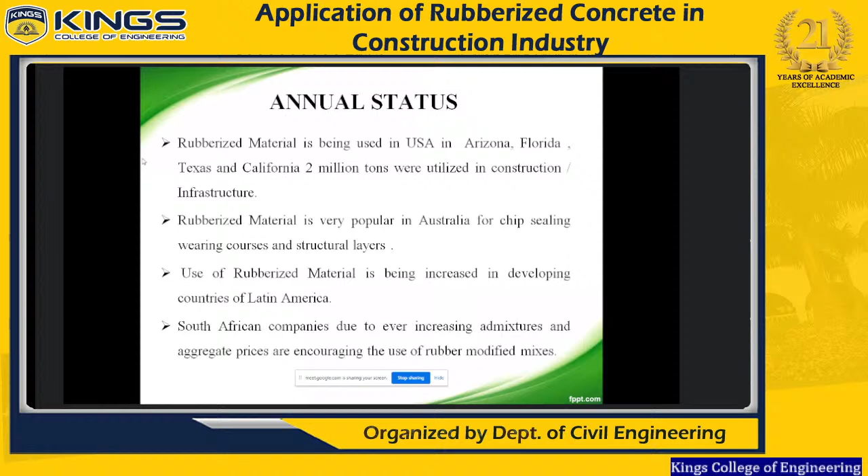The Rubber Board is located in Kottayam, and most natural rubber is obtained from Kerala and some parts of southern Tamil Nadu, like Kanyakumari and other places. There are a lot of rubber trees there, but they don't meet the actual demand of consumers or customers, so we need alternative material. Some synthetic materials are produced for rubber, and most probably those are being used since natural rubber has limited use and is insufficient for the consumption needed.

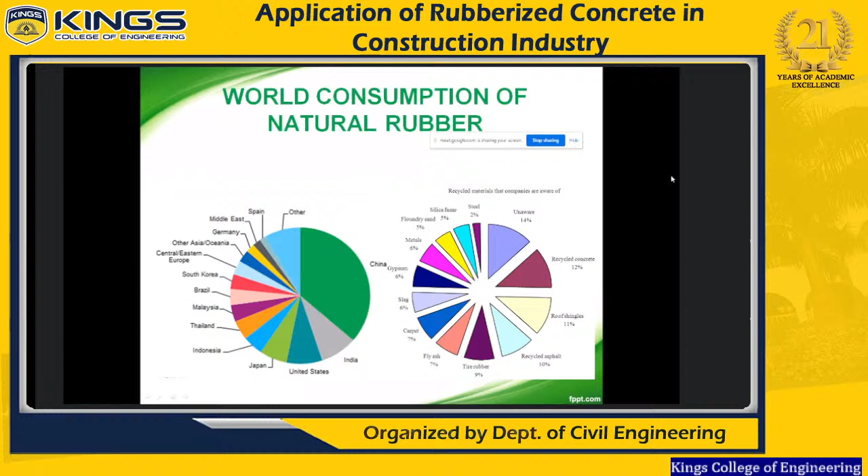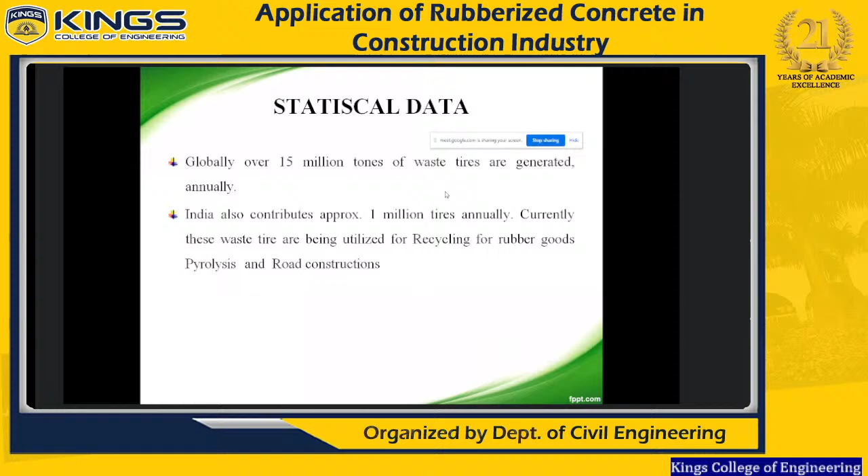It is some statistical data. We are aware that globally we have 15 million tons of waste tire generated annually. India also contributes 1 million tires annually. Currently, this waste is being utilized for recycling for rubber goods. Some are using pyrolysis and road construction.

So we see here for dumping or burning, somewhat huge smoke will be there. It causes underlying air pollution. Don't think that we are creating the air pollution only at a particular source point. It's not the same - the air pollution travels a few hundred kilometers.

Even that's why we are facing a lot of this in Delhi. So the air pollution is not just from the automobile and other things in Delhi. There are point sources and non-point sources. Somewhere in other states, Haryana and Punjab, after harvesting, they burn wooden material and other things. It also causes that. So it travels a long way, it doesn't have a particular point.

It may have traveled, so it's a very tough task to estimate or assume where the pollutant air transfer occurs, where the plume will be dispersed due to wind and other directions - they travel anywhere else. But somewhat limited for consideration is solid waste.

We know that dumping yards will be there, and the leachate goes down and at times groundwater is also to some extent contaminated. Same like the liquid waste, for example wastewater streams for consideration - river Kaveri in Tamil Nadu.

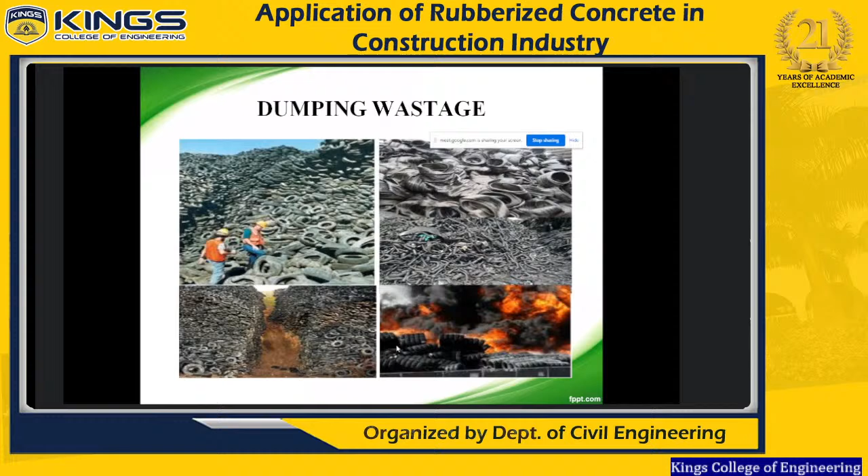There it starts from Mettur Dam up to Trichy. There are a lot of point sources that pollute in Bhavani. There are some industries there for dyeing industries, Komarapalayam, Pallipalayam. Same like that, Karur also has a lot of industries that dispose directly into the Kaveri River. This also pollutes it. That is the entire scenario.

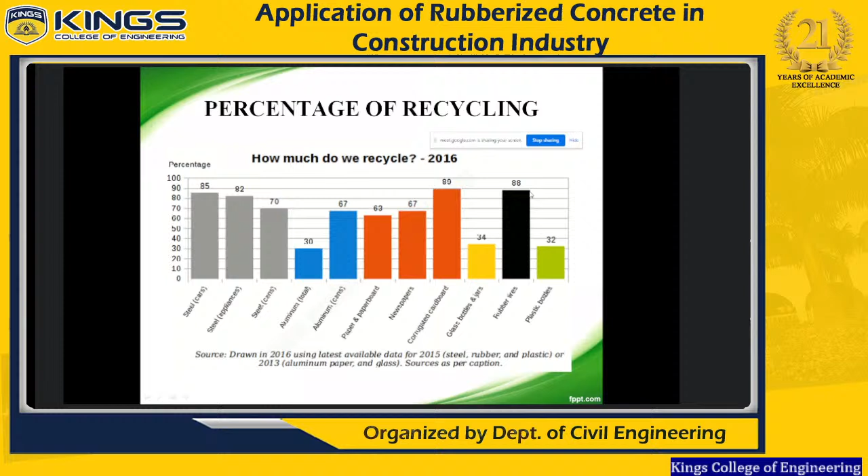So we are more focused on the waste tire material, how to have a good material that is reusable or recyclable, where our application is concrete, especially for civil engineering experts. We searched the literature review of what is there for using the rubber material for consideration in non-load bearing structures like paver blocks.

So we need paver blocks for railway platforms and others. Even of course there are temples, car parking, as well as bus stands - we need these for paver blocks, hollow blocks somewhere. We think for electric poles, retaining structures, insulation structures, the waste tire material may be identified and used. So load bearing structures, somewhere in railway sleepers if possible, as well as foundation material.

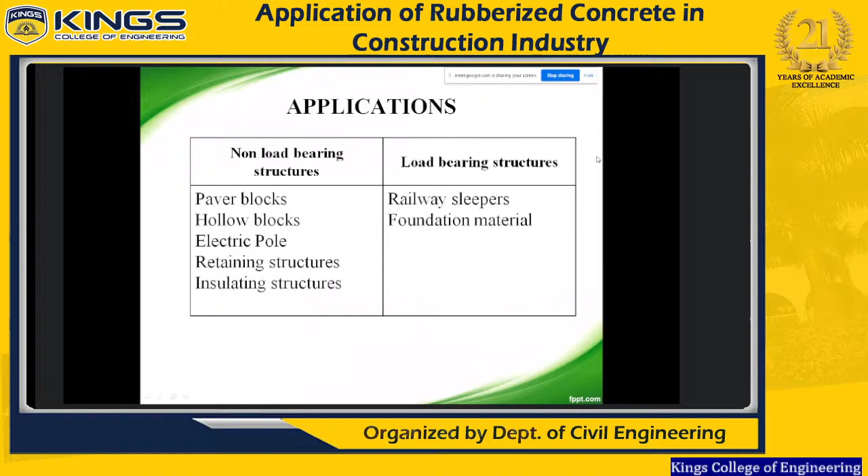So good bearing between earth and that's somewhat in base isolation structures - whether for earthquake and other natural events, we need some cushioning effect for that. So we think these are the applications. So somewhere this is visible in literature - I'm not spending much time here.

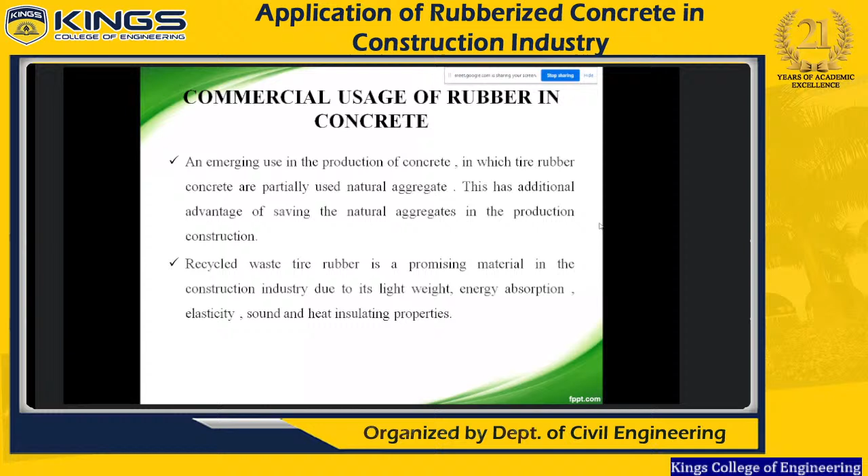So commercially it's rubber and concrete. A lot of literature is available. Most probably rubberized concrete is so-called 'lightweight concrete.' Somewhere there is energy absorption, elasticity, good elongation material for rubber, some action usage, and sound and heat insulating properties also have been observed.

So we are identifying some stronger and weaker areas. The stronger area, somewhat identified, is seismic resistance being strong, good insulation, increase in elastic property. The weaker area is of course we are aware that there is not a good bond between rubber particle and the concrete material, whether fine aggregate or coarse aggregate - not a good bond.

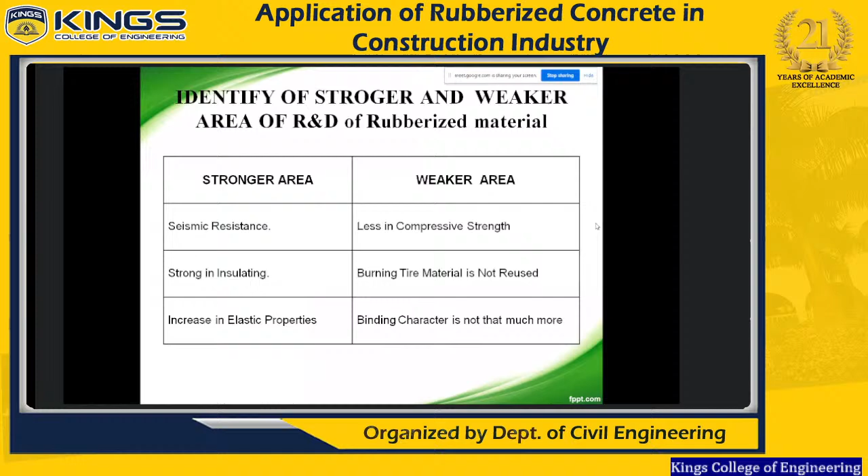We conclude that the most focused research isn't always positive research. So we add some material in the concrete, whether fine or coarse aggregate replacing that, and we got good strength. Only accepting that is not a correct way. Even negative research is also good.

For rubber, we are already aware that waste tire material added with concrete definitely reduces the compressive strength. This is an institutionally known truth. But we want to explore to some extent how to reuse or maximize the use of rubber material in concrete. That's why even if the result values will be less, we think about what is the maximum optimum content of replacing rubber material to serve the environment, and based on that we have worked on this particular project.

So this is the main objective focus. This research focuses on application of experimental investigation on structural use of tire-derived aggregate to find alternate waste material wherever possible in the construction industry.

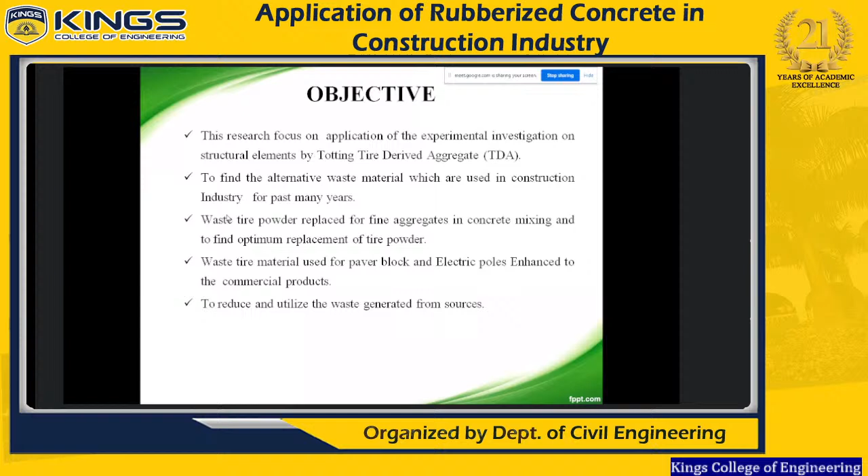Powder as well as fine aggregate are used, some as waste tire material. There are fibers as well, which are also reused to some extent, whether possible for electric poles or other commercial products, to reduce and utilize waste generated from these sources.

This is the methodology of the project: literature collection, identification, material mix design, and casting, comparing with normal control concrete by replacing materials. Finally, I have the results and discussion.

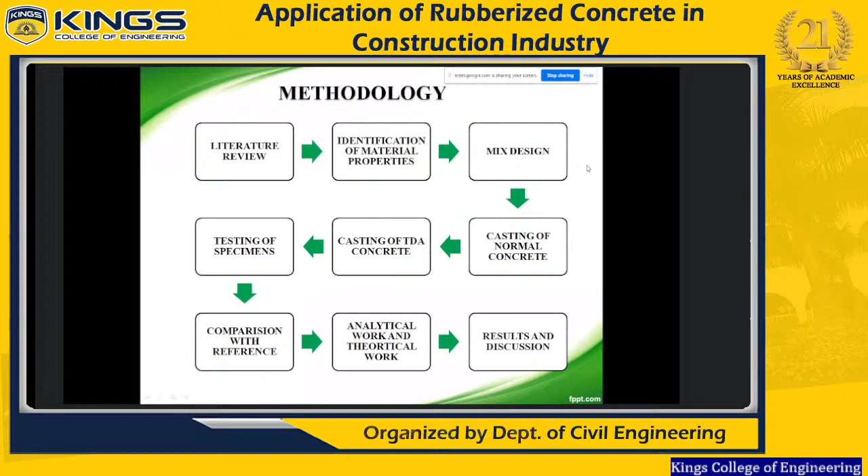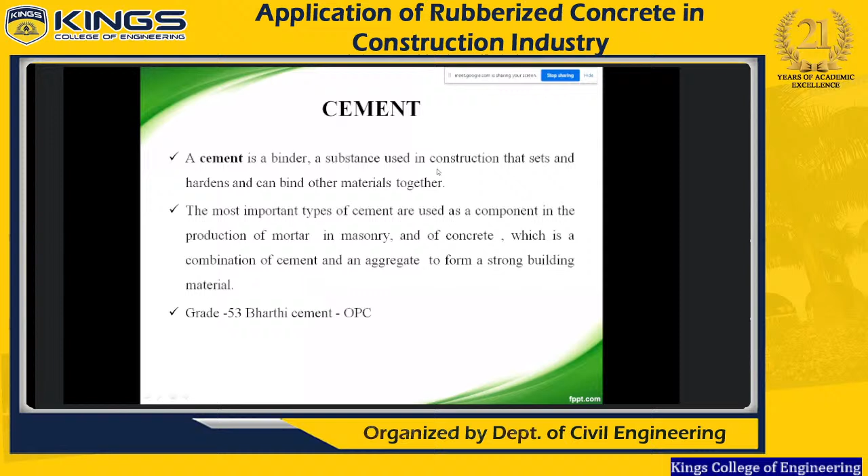This is the common material used in concrete. Cement we are using for this is 53 grade cement. River sand is also used, of 4.75 mm size.

Nowadays we talk more about M-sand and other types of sand because the Government of Tamil Nadu has banned sand mining wherever the Kaveri Delta region, especially the river course, is concerned. The river depth increases if it doesn't reach the water in time. Rivers naturally meander and through such activity produce some sand, but we were always over-mining the sand, which is not good for irrigation and other related activities.

So that's why the government banned it. Now we are thinking of alternatives such as manufactured sand, and others are using fly ash bricks and related compounds, and some use gypsum for plastering and other work. So we should not always depend on one material; we depend on other materials that are also good for that.

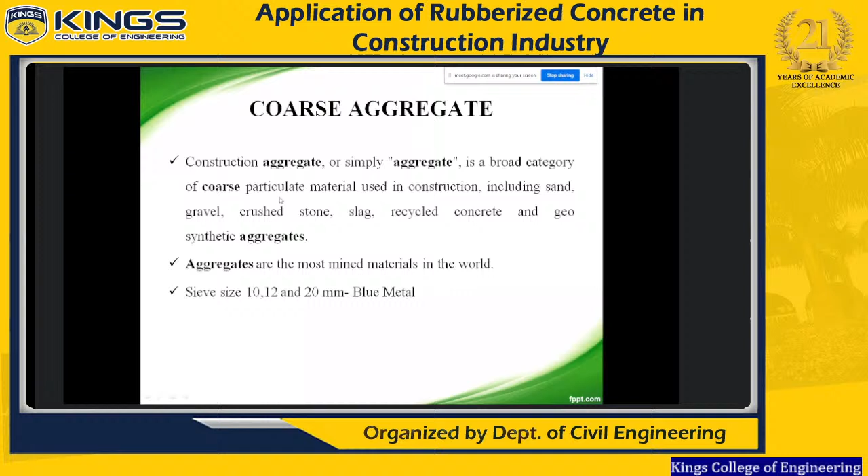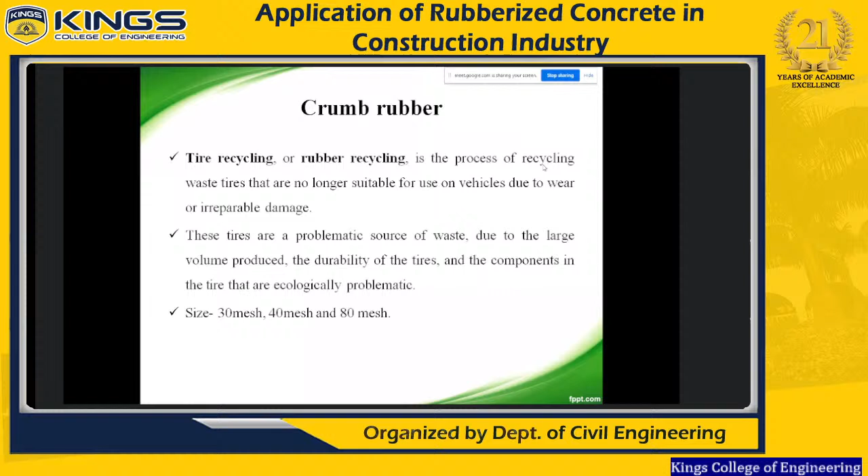Coarse aggregate is taken in various sizes: 10, 12, 20 mm. It's also obtained from sources such as paver blocks and AM bricks. We get material from different sources like marble powder and others. Crumb rubber of various sizes - 30 mesh, 40 mesh, and 80 mesh - is also taken from these sources.

We are taking rubber from two sources: one from Balaji Rubber at Salem, and Arihant Oil and Chemicals at Delhi. We procure these sizes of rubber. The 30 mesh is almost 0.6 mm. Some quality details are mentioned here too - waste tire chips is 10 mm.

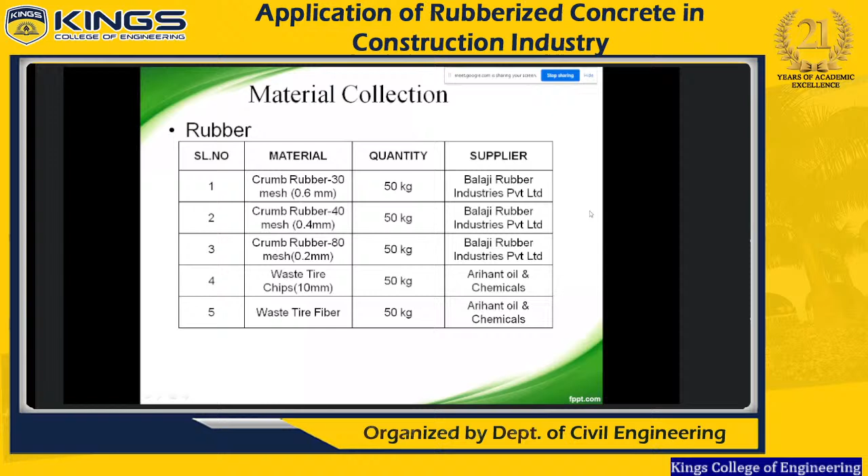Fiber is also obtained for replacing concrete in various ways; it's a substance of rubber. Its raw material, common manufacturing process, and other details are given here.

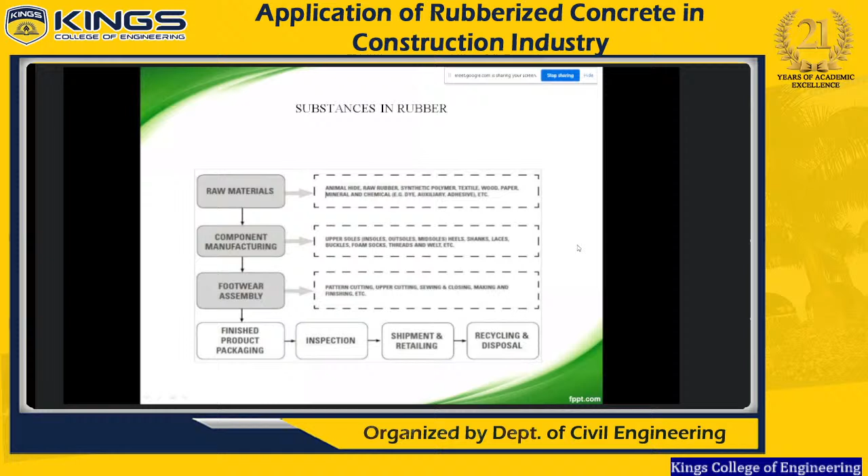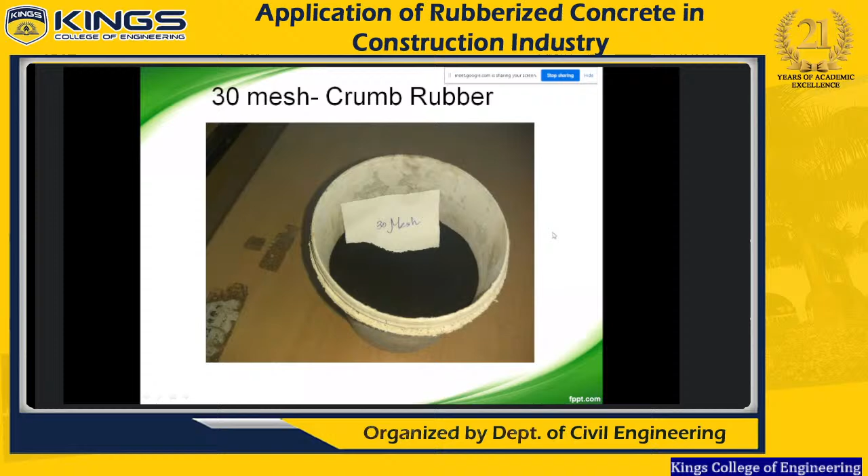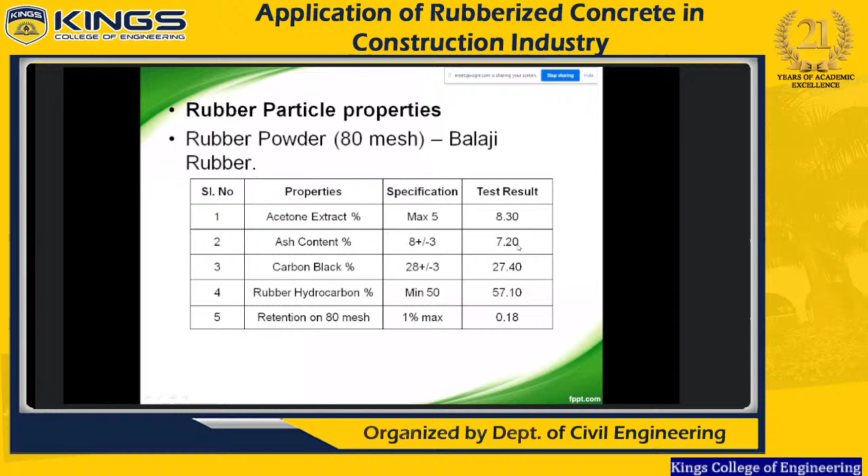40 mesh and crumb rubber 30 mesh - various sizes are mentioned here. We are using crumb rubber as a substitute material to some extent, so we needed some chemical properties of rubber. Our acetone extract and ash content are presented in the table, same for 40 mesh and 30 mesh.

For admixtures, we are of course aware that waste tire material doesn't form a good bond, so we did a chemical treatment. We used a KOH solution in which the crumb rubber particles were immersed. After 1 day we took them out, dried them, and used them for concrete and other purposes.

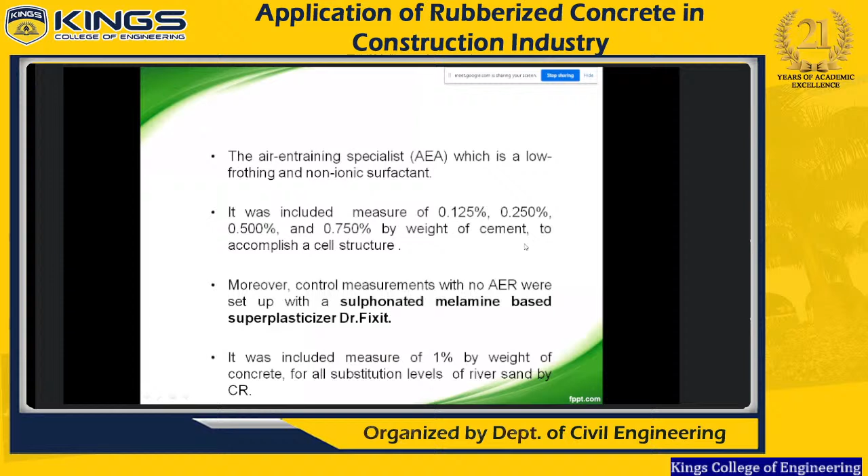Some air entraining agents are also used to somewhat improve the strength of the concrete, for certain characteristics. We use a particular brand name - a sulfonated melamine based super plasticizer. For water, we use local potable water.

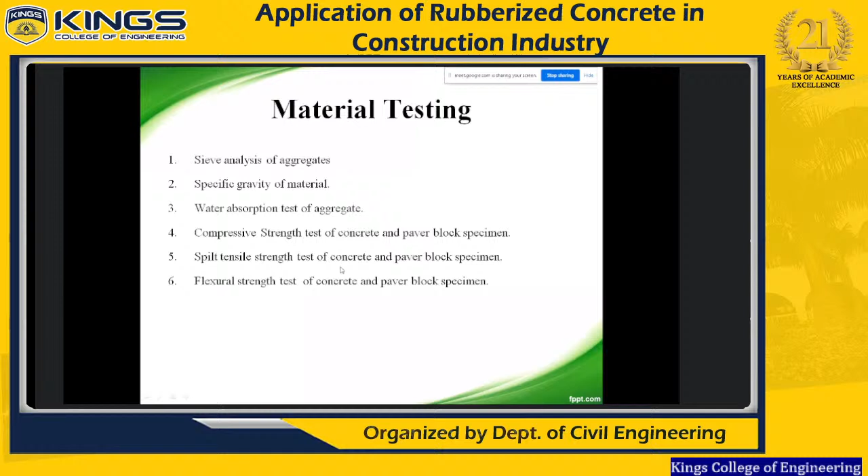Material testing is a basic test carried out, including sieve analysis, specific gravity, water absorption, and compressive, split tensile, and flexural tests carried out for concrete specimens. This is the specific gravity of the core material here.

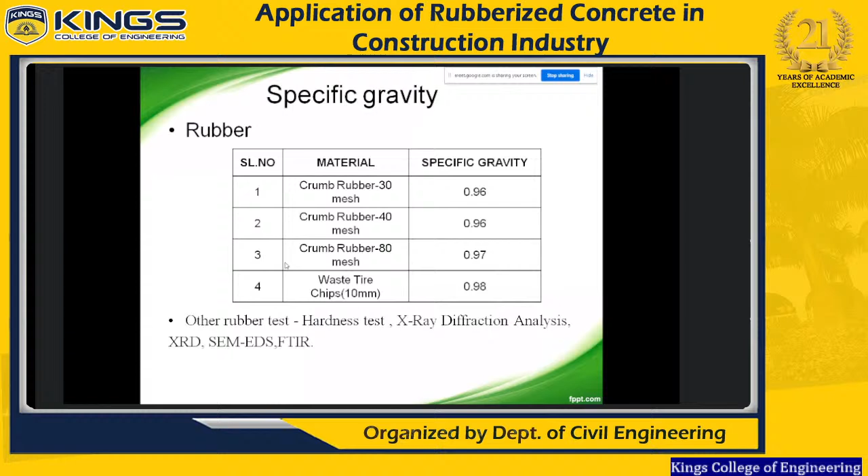For morphological characteristics, we conducted tests using XRD, SEM, and FTIR, along with other tests.

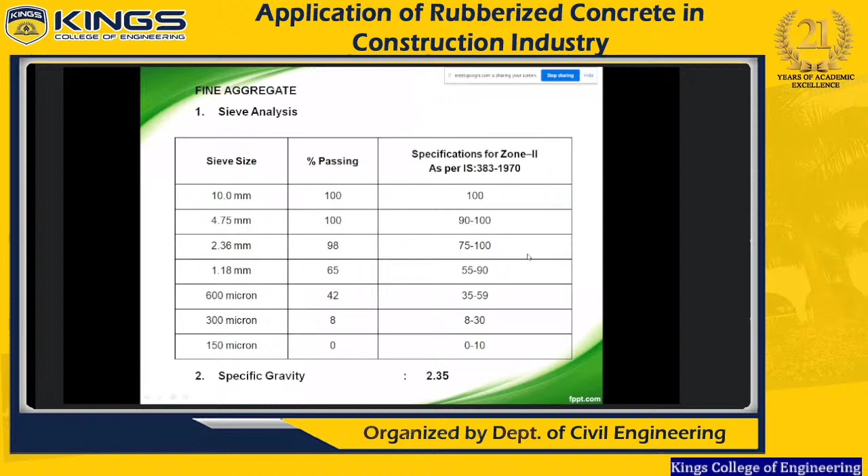Sieve analysis is simple, we are aware of that for fine aggregate. So the mix design we arrived at is based on IS 456:2000 mixed design data.

M30 design mix - we arrived at this based on water cement ratio trial mix. For M30 it is 0.45 water cement ratio, and water content per meter cube of concrete from table IS 10262:2009.

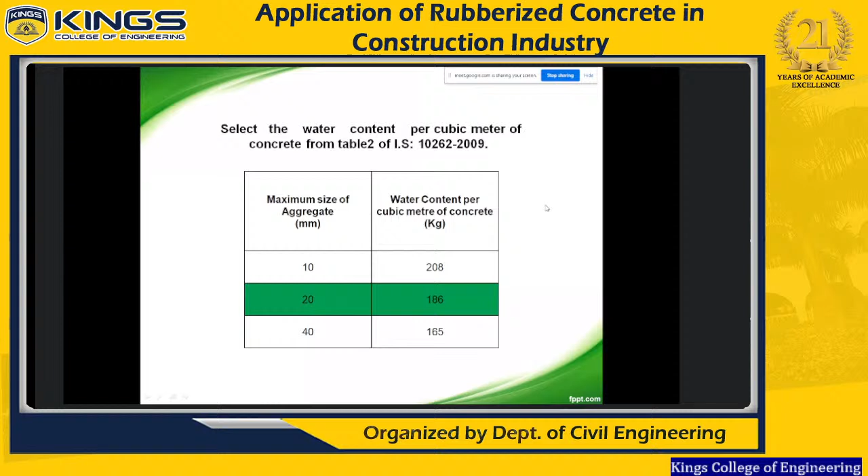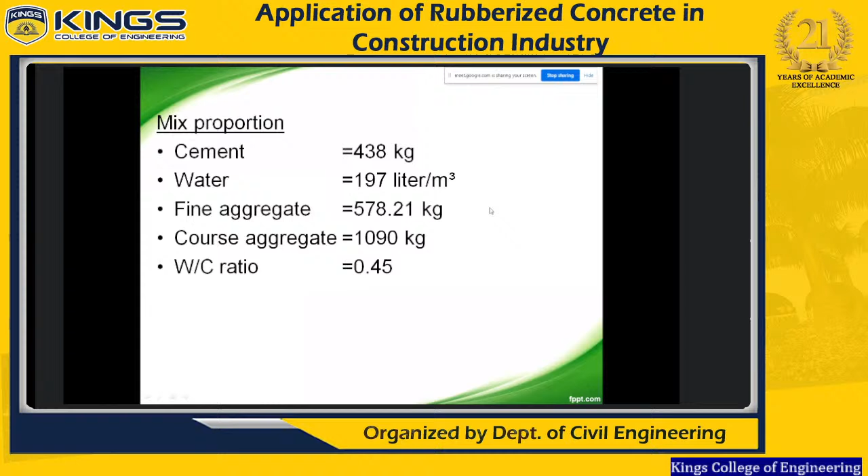We took the maximum size of aggregate as 20mm. The M30 design mix is a known standard for various types of design mixes. Finally we arrived at the quantity for M30 grade - cement, sand, coarse aggregate, and water cement ratio.

So we planned to conduct testing in three manners: cement mortar cubes, cement concrete cubes, and finally we made paver blocks, which were also tested. According to that we planned the study.

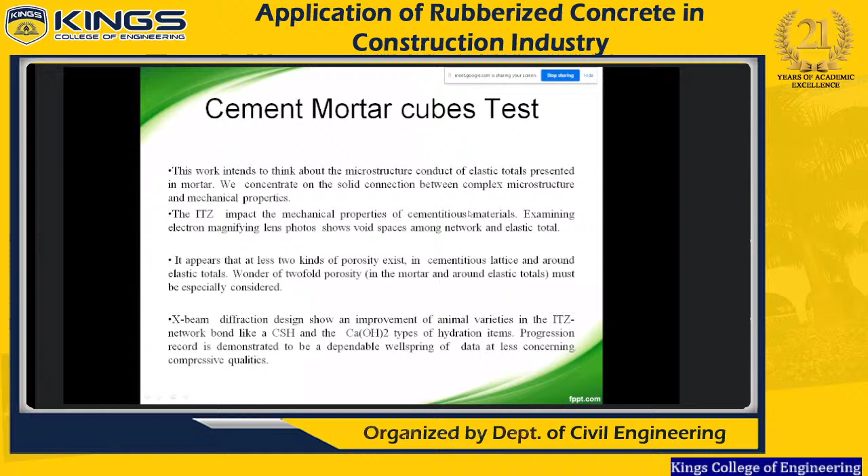So for cement mortar cubes, we conducted tests for basic strength and other parameters. At the working level it is rubber mortar.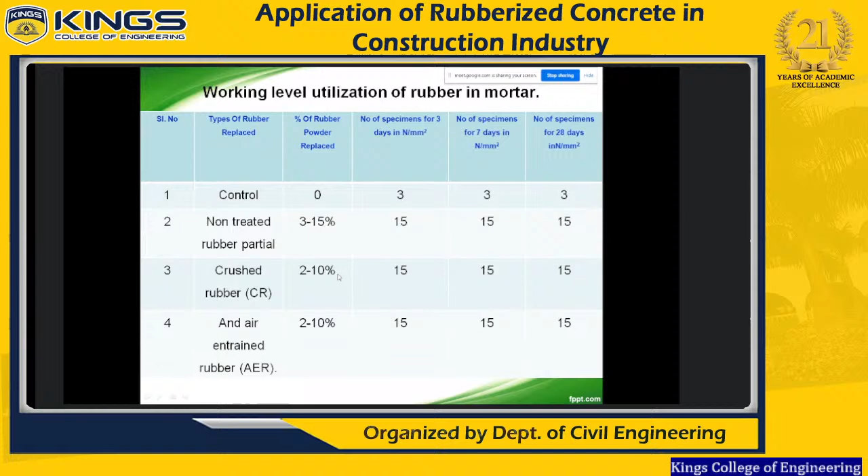Non-treated rubber, whether 15% will be added. Crushed rubber 2 to 10%. Air entrained rubber - this is called an air entraining agent, which we tied in. So various types were involved.

Other tests we carried out include the slump test for the control mix. Some basic tests we carried out for concrete added with tire material.

We used a percentage of tire derived aggregates up to 15mm. We observed that increasing the percentage of tire derived material decreases the slump value. So we need some air entraining agent to add, because we are studying the bond between the rubber particle and the coarse and fine aggregate, which is somewhat minimal if we are not getting a good slump value.

So for workability, based on design, we need this for heavily reinforced concrete sections - beams, slabs, and slip form work. Pumped concrete is medium for this. Most of the student community is not aware of slip form work.

Slip form work is used to construct chimneys or silos, especially for cement plants. The diameter or width is high - 10 meters or 15 meters. A cylindrical portion in a cement plant is called a silo, whether it's a blending silo or a cement silo.

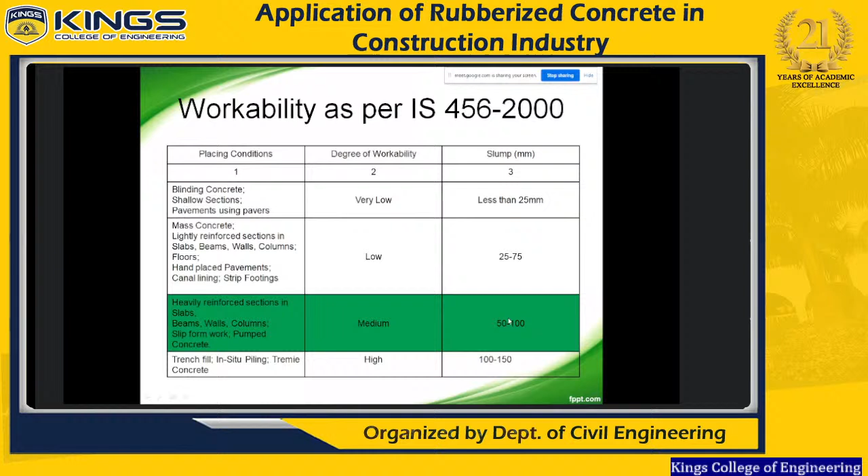So this creates a need for slump value consideration. Most probably pumped concrete is used for such work, especially for silos, chimneys, or high elevated apartments - we need pump concrete there. The slump should always be maintained at 100 and above, which is good for easy flow of the concrete.

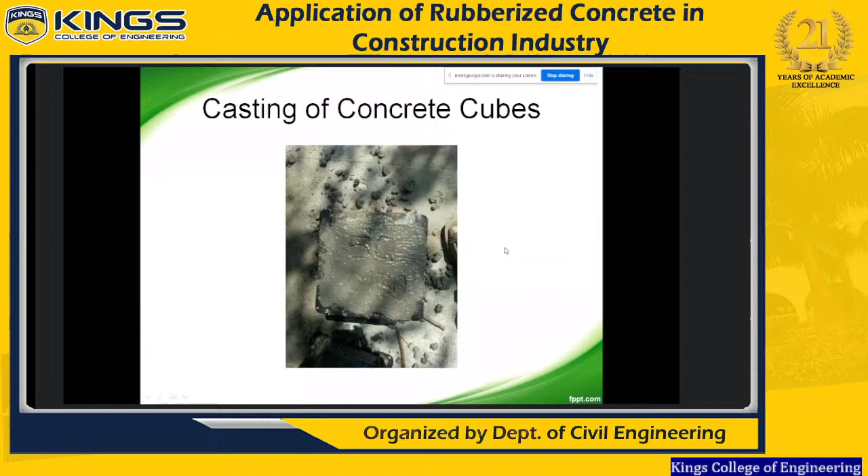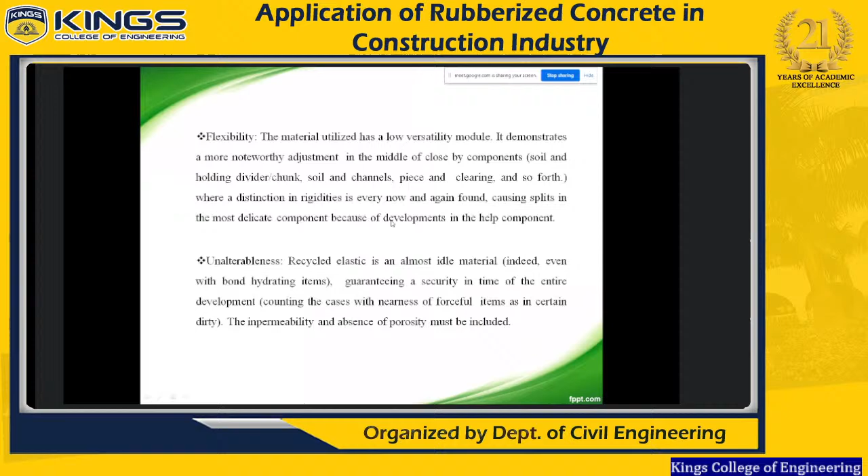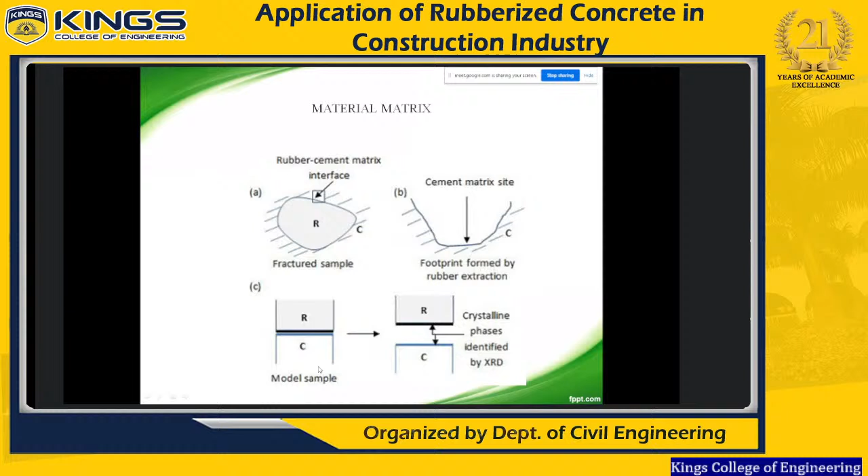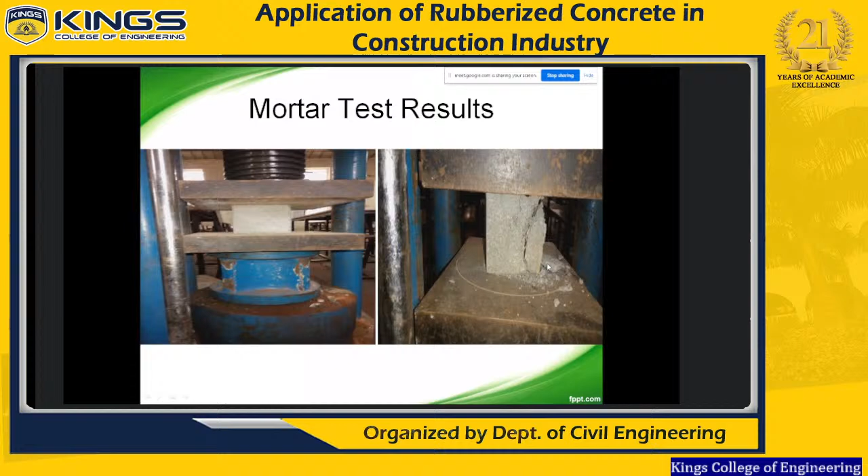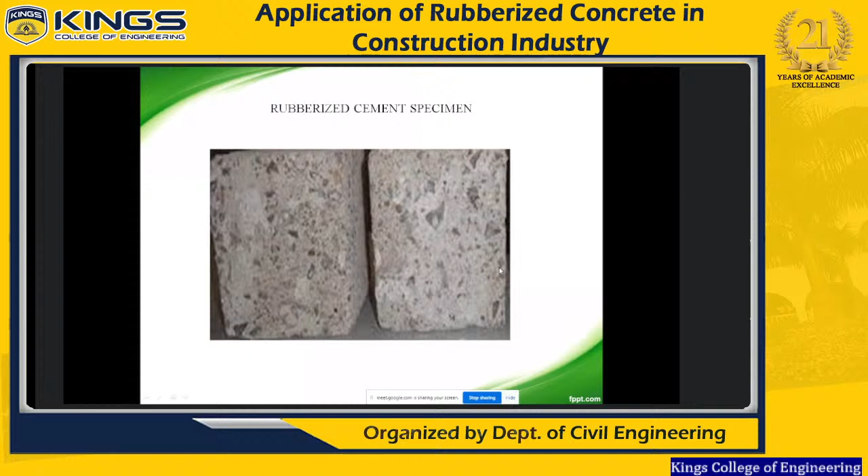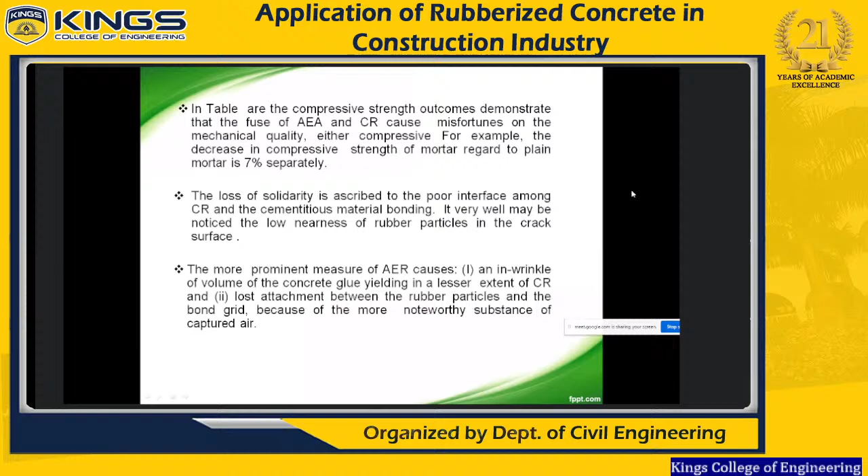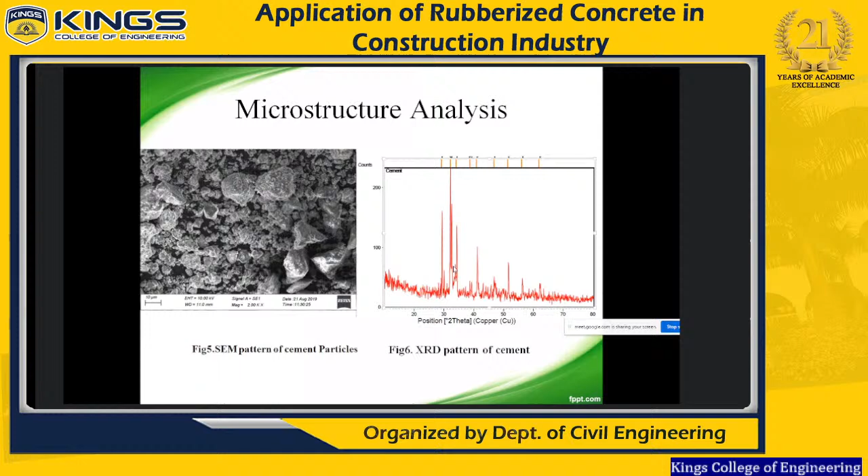So this is a simple pattern for XRD, X-ray diffraction pattern. Based on that, this is 2 theta for wavelength. For example, for silica, the silica part for XRD at 2 theta degree may be around 30 or somewhere at 42. So any chemical component is easily identified using XRD - it's for rough estimation, giving the percentage of the chemical component present.

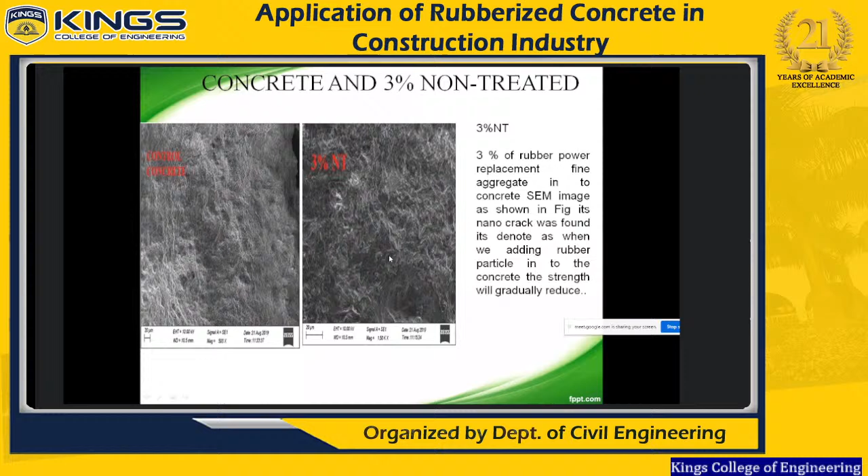Same like that, non-treated rubber, our control concrete - what will be 3% addition of non-treated rubber in proportions. Some analysis also carried out, same for 6%, 9% non-treated rubber, 12%, so there's a diagram spreading that, 15% non-treated rubber. So it is SEM analysis.

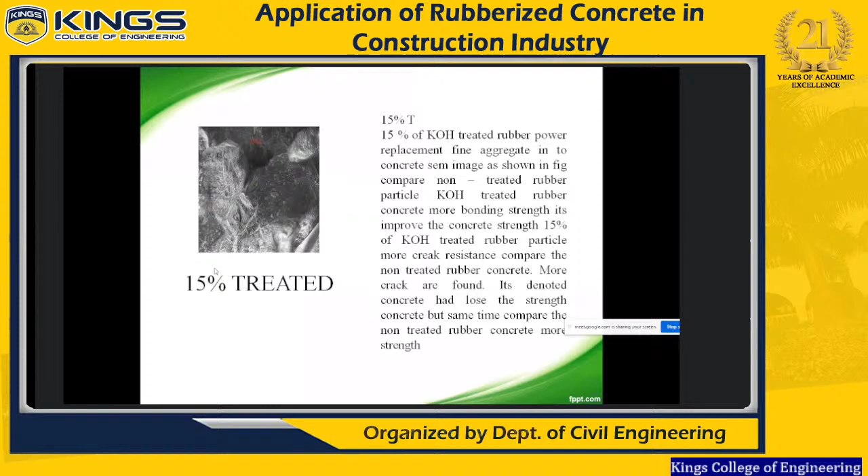So it is treated - what we mean is treated rubber is where the raw rubber crusher powder, for example 30 mesh, is a little bit washed with water and dried. Oven drying is not required, just normal drying. After that, taken to mix with concrete and made for testing - that's non-treated rubber. Treated rubber means we immerse it with KOH solutions, then take that rubber and make it for study - that is called treated rubber.

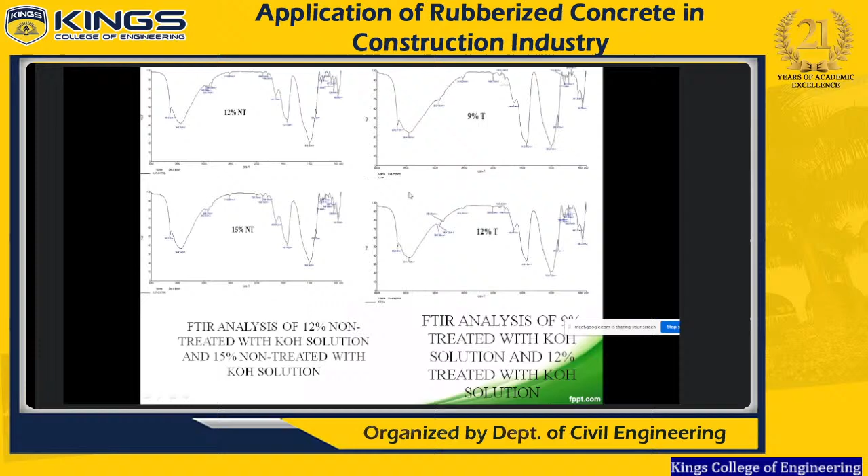So FTIR analysis is carried out in different ratios also here - 6%, 9% of treated and non-treated. Based on the peak, we have identified that the chemical composition of rubber will vary.

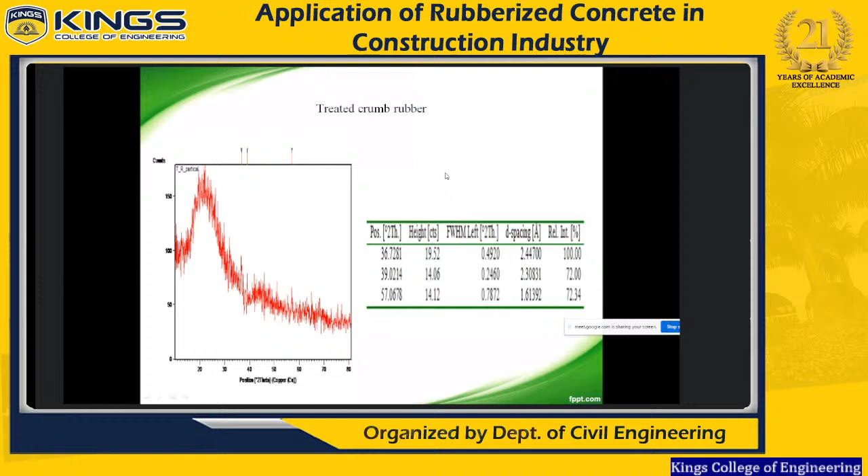So it's another non-treated rubber, also seeing here treated crumb rubber - the graph shows what the actual things will be there before casting the concrete, as well as after casting the concrete, how the chemical composition present in the concrete will be.

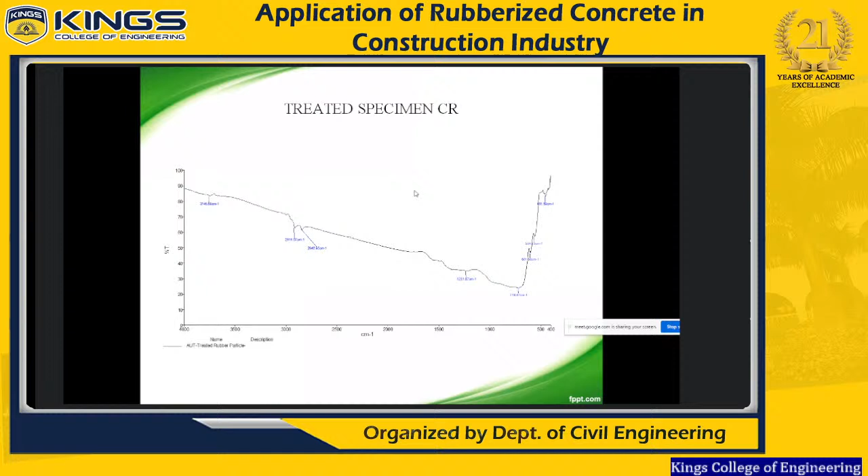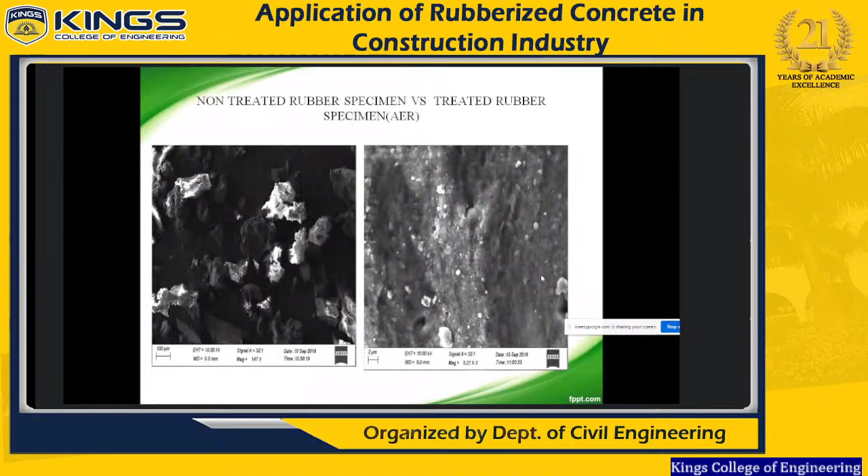Control specimen versus rubber specimen, we compare with SEM analysis and various parts, and how the constructor application will be used in mortar cubes and other things.

It is for crusher rubber and air-entrained rubber with also potassium hydroxide. We are getting that compressive strength, and how that variant is shown in the graph here.

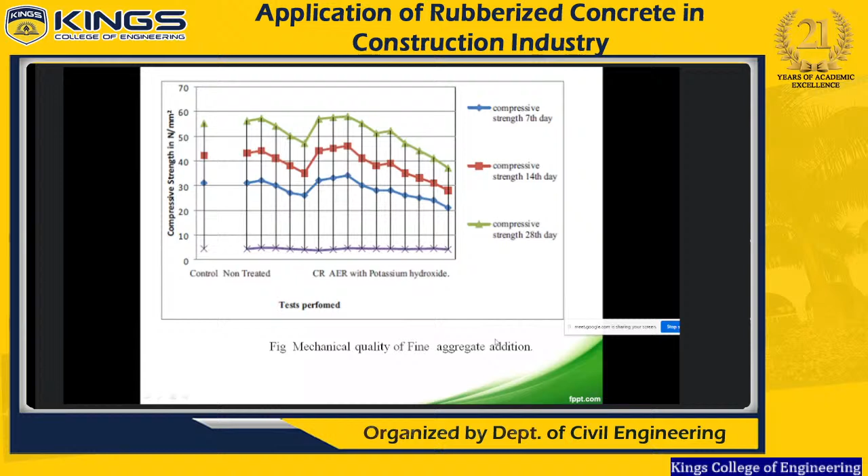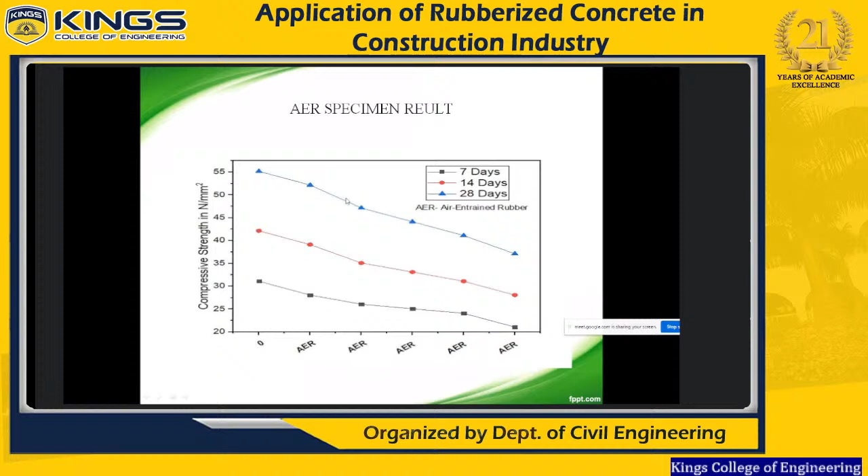It's also control specimen, non-treated rubber also present here. AER specimen results also there. How will increasing the rubber content affect it? Definitely we observed that the compressive strength will be a decreasing scenario.

Next, for the hardened concrete test, we carried out M30 design. It is a chart maintained for various mixes from the percentage of replacement rubber. We carried out only 3 tests: compressive strength, split tensile strength, and flexural strength, with non-treated as well as treated specimens.

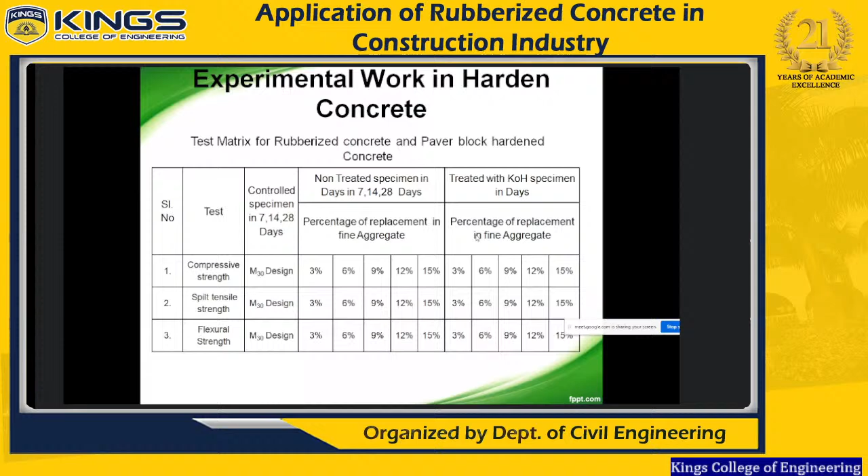The compressive strength we obtained was maximum at 6% of non-treated rubber. They got it for 34.22, thereafter reducing. This green color indicates optimum replacement of 6% for non-treated rubber, as well as 9% for treated rubber.

So we observe that this is the scenario for maximum possibility to add rubber without treatment at 6%. But the unit weight is also important - we are aware that at 6%, don't think the weight will be less. The unit weight of rubber will be less compared with coarse as well as fine aggregate.

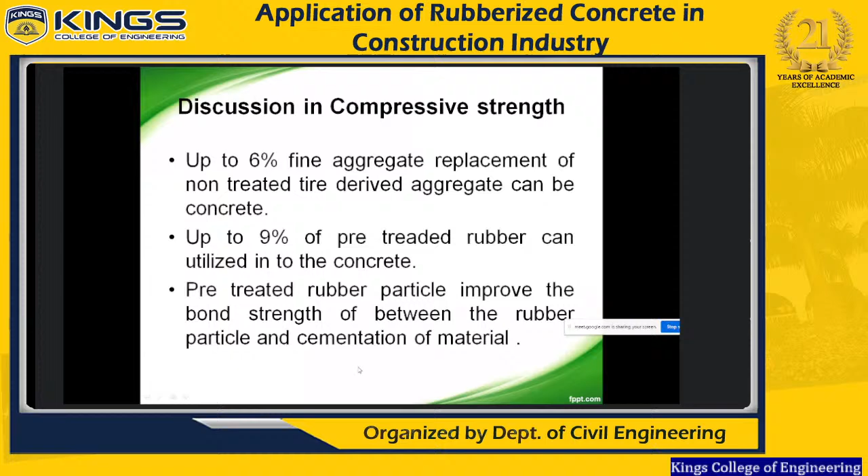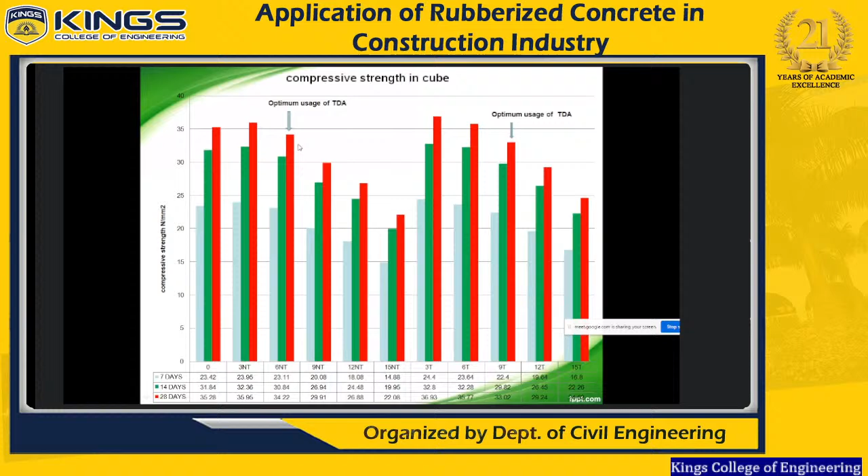Somewhere we observed other graphs for optimum strength of cubes in optimum usage of tire derived aggregates. So here for 6% non-treated, same like that for 9% treated. In various days - 7, 14 and 28 days - we have taken optimum as 28 days to mention here, showing the compressive strength of test specimens.

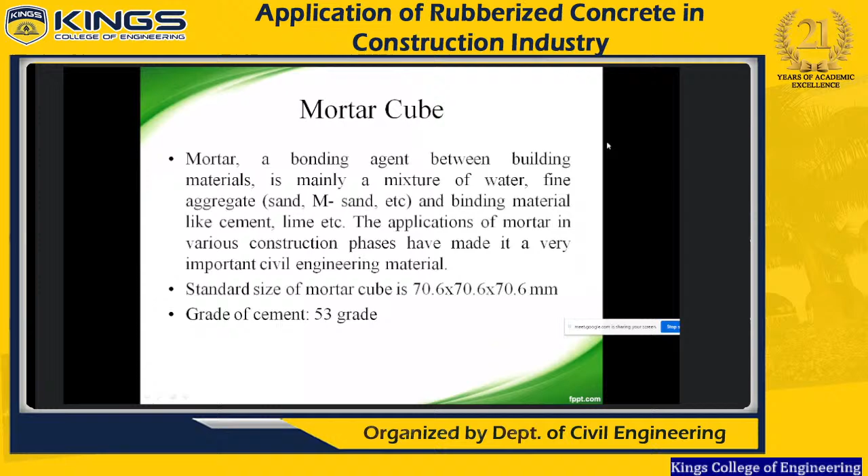Mortar cubes also we are discussing in the last slides. So the mortar cube will be there, with ratio 1:3. The strength observed was for 9% non-treated rubber.

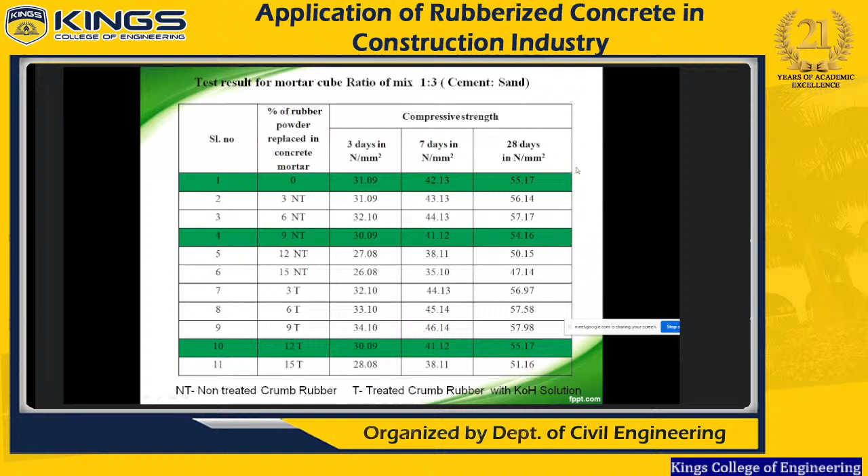Adding with the mortar cube, they are getting here for 12% treated rubber the maximum strength for mortar cubes in compressive strength. So it is the optimum level maintained here.

It is also mortar cube test results. We observed that 9% non-treated and 12% treated rubber will be good for mortar cube, compared with in concrete cubes where just 3% add - 6% non-treated rubber, 9% treated rubber - gets the optimum strength.

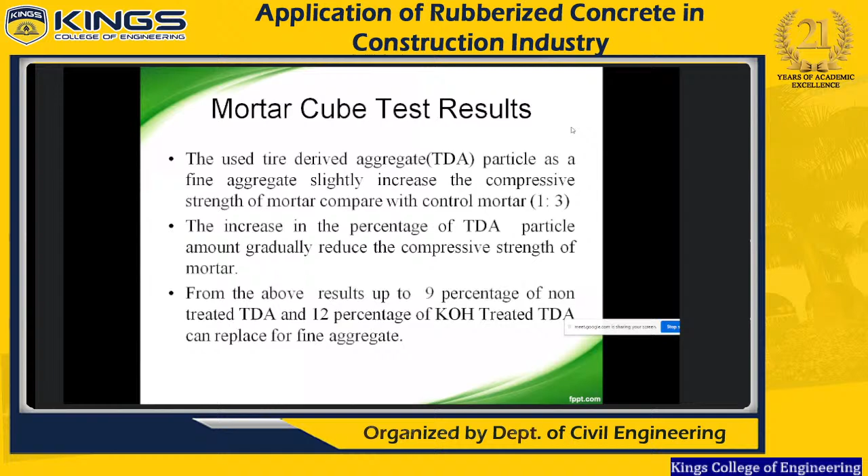So next one, split tensile strength. Of course we are aware of some basic and important properties of tests on concrete - concrete is weak in tension. So we now see advertisements from a lot of cement manufacturers. They say including some specialized cement will help reach tensile strength of concrete to some extent, and studies and research are also going on.

But not up to the point of whether, without steel, concrete will be good or not. The focus on research is still going on. It is necessary to determine tensile strength for loading of a member where a crack occurs. This split tensile strength test was carried out in our laboratory.

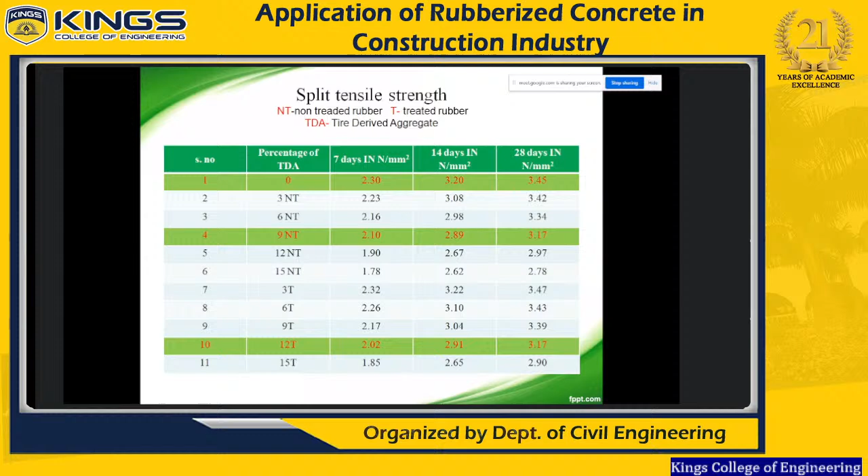Based on this ratio, we obtained the split tensile strength. 9% of non-treated rubber will be good for getting the optimum value, as well as 12% of treated rubber getting good values.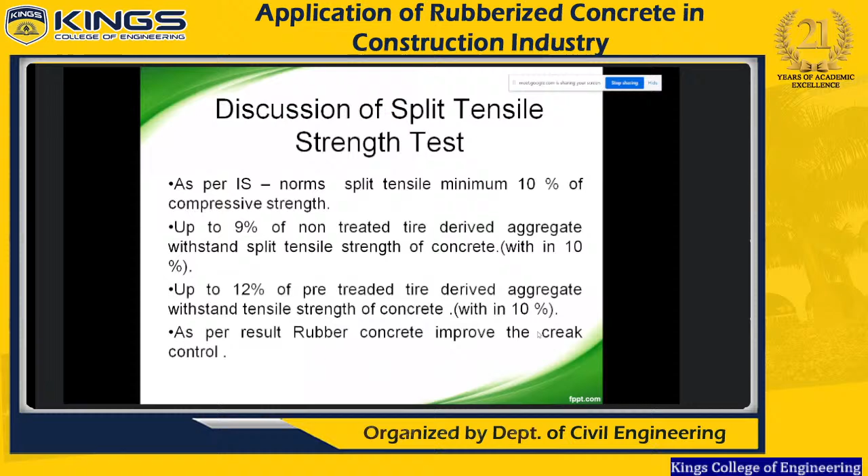As per the result, rubber concrete improves crack control. We are aware that rubber material is somewhat elastic in nature, which is also good for that. It is the split tensile strength of the cylinder - the optimum split value as well for 9 and 12%.

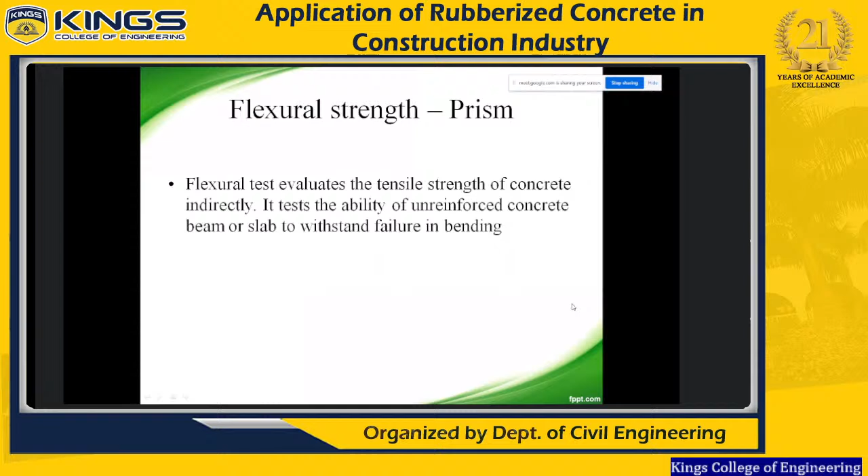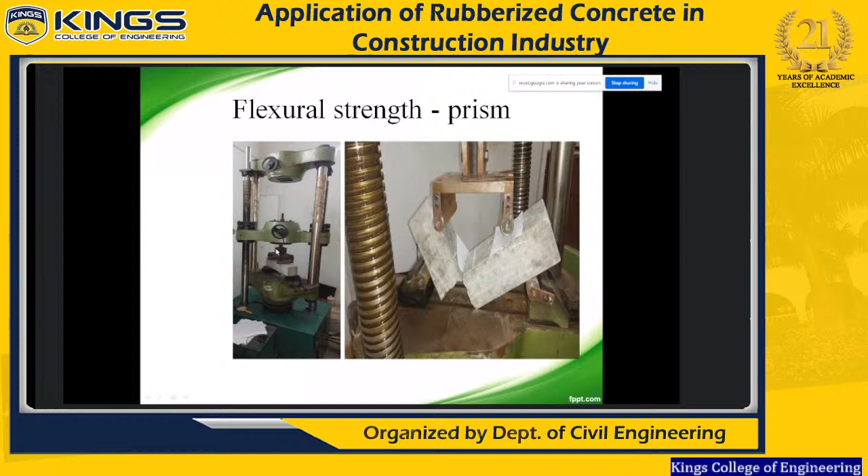So next, finding the flexural strength of the concrete, in some action prism, we carried out the test. So a small beam called a prism is marked and put on to apply load. The values of the prism show flexural strength is good at 15% of non-treated rubber.

They got good results there. So here also for treated, also 15% replacement shows slightly increasing results. We identify that compressive strength is somewhat reduced, but split tensile strength and flexural strength of concrete mortar compared to control concrete are somewhat good results.

That's why we need further research on how to improve the compressive strength, how to encourage rubberized concrete use in various aspects and real world problems, especially in civil engineering applications. It is the flexural strength prism - results shown here.

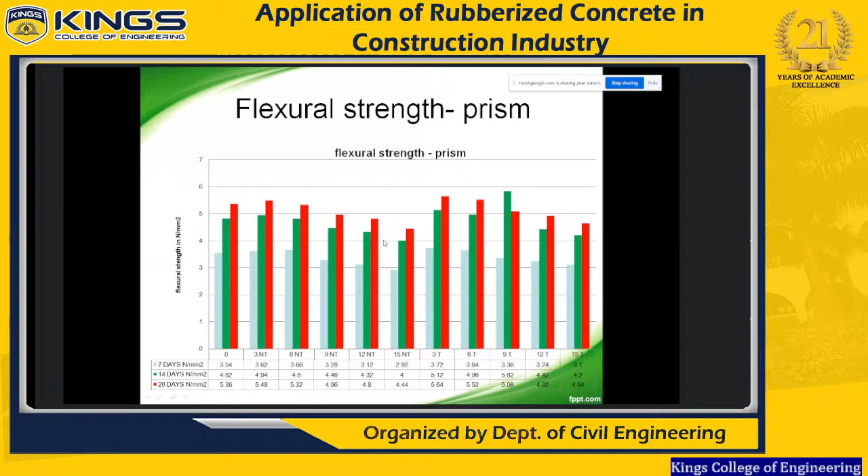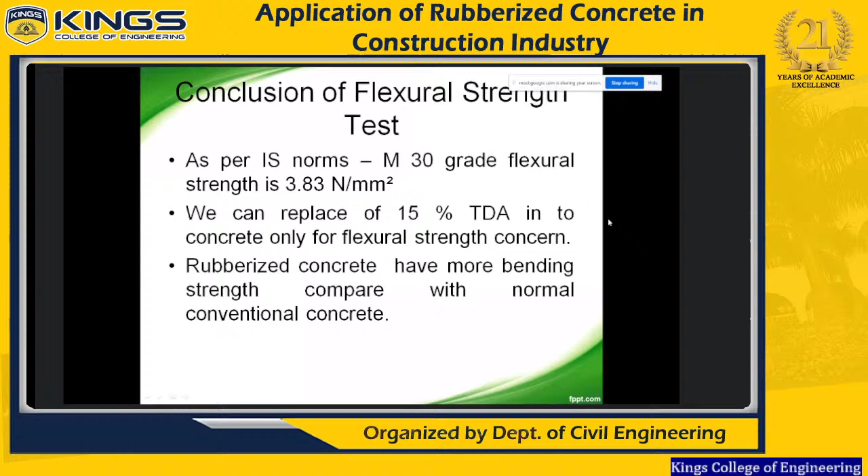So we are aware that the bending strength compared with the normal conventional concrete is somewhat higher. We obtained that. We also found the corrosion resistance in the concrete through the RCPT test, which we carried out.

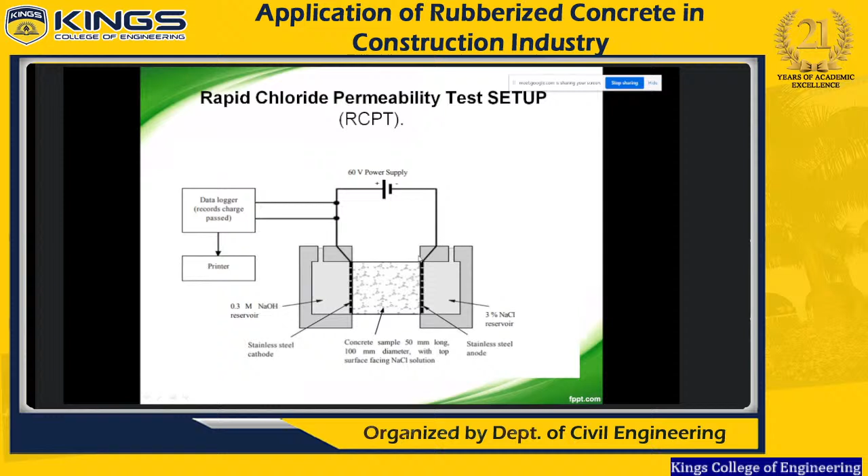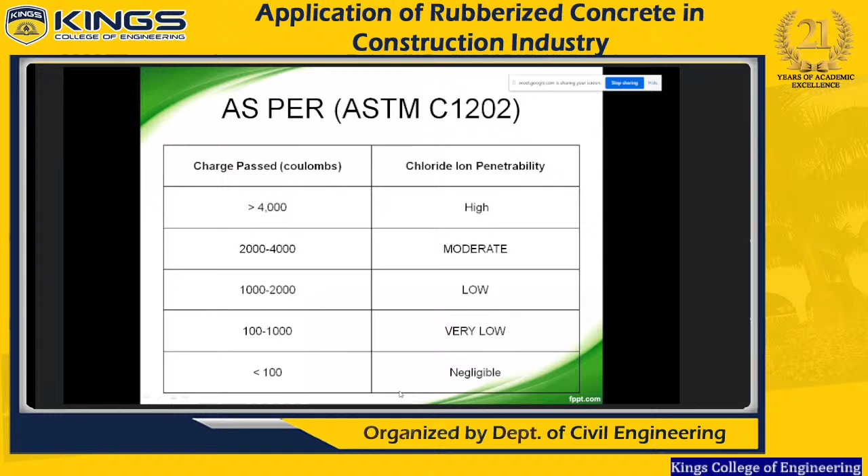Rapid Chloride Permeability Test, in some action. It is a simple concept. As per ASTM, based on the charge passed, chloride permeability less than 100 is negligible, and greater than 4,000 is high. The testing apparatus was carried out in some other institute for the RCPT test.

So we think, why not, since we already did paver blocks for concrete cube as well as for concrete mortar, in real applications one of our students in M.E. Structural Engineering, Vijayarajan Raghavan, is an engineer working in the Government of Tamil Nadu. We needed support too for an electric pole, so we gave that project and Mr. Vijay Raghavan executed the project.

Wherever using the electric pole, we know that they use Thane cyclone and other cyclones hit Tamil Nadu every year, especially in the southwest monsoon, which starts from the month of May end, the June first week, in coastal Kerala, Goa and Maharashtra, hitting those entire places as well as some parts of Tamil Nadu.

They get huge rain, and also the northeast monsoon started from the month of September, October, November and December. Every year there are cyclones that hit a lot of electric poles, especially Thane and other cyclones, here in our institute located in Trichy.

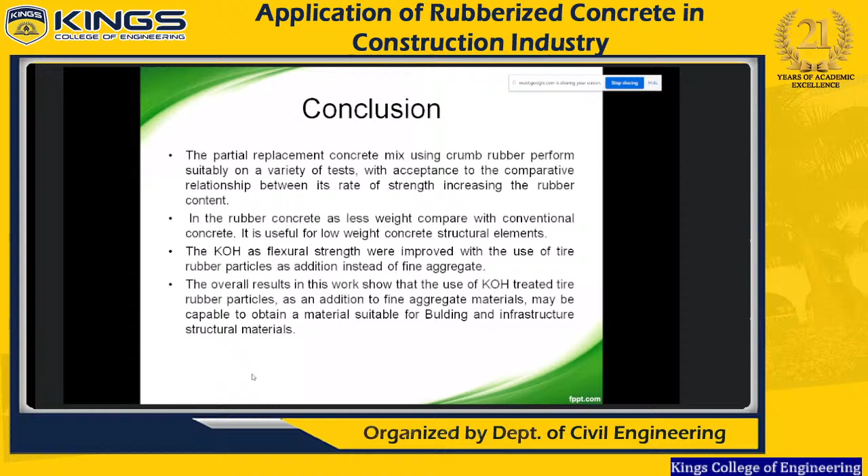Air-entrained concrete into rubberized mortar permits satisfactory functionality despite the more prominent substance of crumb rubber considered in examination. It consists of crisp mortar expanded as measured by the AER expanded in the group. The functionality was observed particularly for CR content.

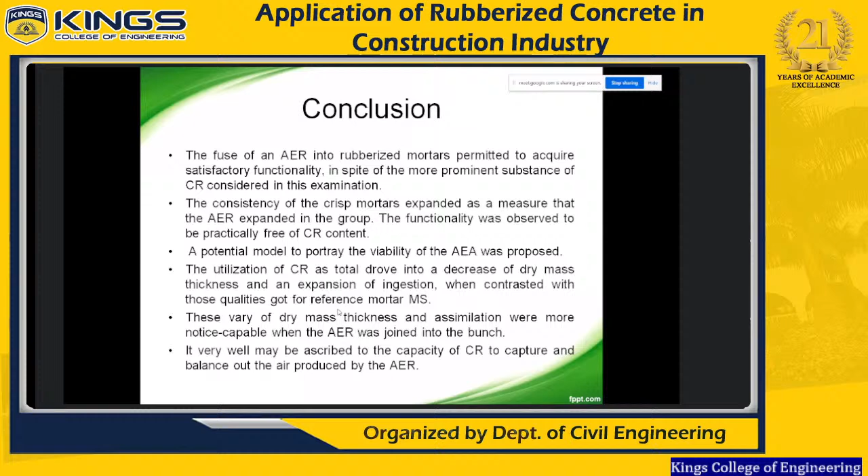The compressive quality of crumb rubber is somewhat 1 to 10 MPa, with increasing scenarios for constructive application proposed based on physical and mechanical properties. Further studies are required based on these investigations.

In our actual study, we carried out lab scale testing, and we also carried out pull-out tests on electric poles in the electric yard. The strength showed a slight increase, but how consistent that will remain after 3 or 5 years is something we need to determine.

The same scenario applies nowadays for M-sand and other replacement materials. We tested compressive strength and other parameters and got good results, but what the durability will be after 10 or 15 years, we don't know. Only simulation models and other available software can estimate this.

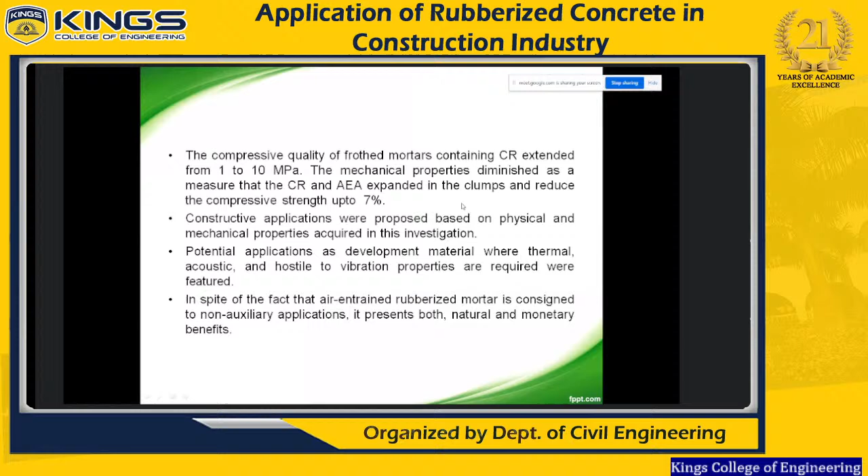How the real world problem will be identified is also a very tough task nowadays. So potential applications for development of material where thermal, acoustic, and vibration properties are required were featured. Despite this, air-entrained rubberized mortar combined presents both natural and monetary benefits.

We are aware that especially for a developing country like India, we are minimizing waste. If we recycle rubber material as well, it will be good. I am not just talking about rubber, but solid waste management in general, especially material imported from foreign countries.

We are recycling and reusing some materials for other purposes. Like in South Arcot district, in Cuddalore, there are a lot of recycling industries. They import material, recycle it, and use it for other purposes, minimizing the dumping or disposal of waste, maximizing reuse wherever green material can be produced or regenerated.

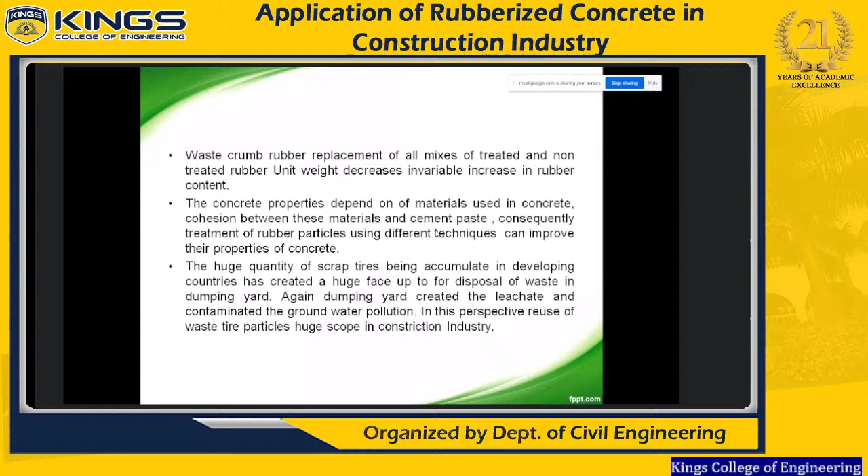Retreading will be there for waste tires, so we retread and use them for 2 or 3 times, and finally we dispose of them. That is good to some extent, but dumping still creates leachate and contaminated groundwater pollution. In this perspective, reuse of waste has a particularly huge scope in the construction industry.